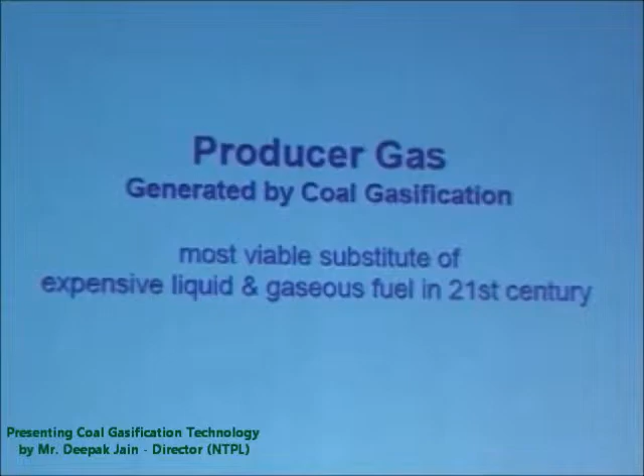Producer gas is generated by coal gasification, which is the most viable substitute of expensive liquid and gaseous fuel in the 21st century. Now, what is gasification? It is a thermochemical reaction that converts any carbonaceous material into combustible gas, known as producer gas or syngas, by using heat. Ultimately, it is the game of partial oxidation of carbonaceous material. The equipment that converts carbonaceous material into gaseous fuel is called a gasifier.

This is for your confidence and strong references. We take a little bit of the history and footprint of coal gasification technology in the world. Coal gasification technology was invented in the 18th century, but industrialization was done in the early 19th century by a German company named Lurgi. The first two-stage coal gasification was developed by Foster Wheeler Energy Corporation, New Jersey in 1905.

The first coal gasifier installed in India was in Jalgora in 1936, in Ranchi, by the company Lurgi, and it was a fixed bed updraft single-stage coal gasifier. Asia's largest coal gasification batteries are still running in Ranchi, Heavy Engineering Corporation, since 1965, all two-stage coal gasifiers supplied by Skoda Czechoslovakia. 10 extended shaft coal gasifiers are still running in BHEL Trichy since 1976, supplied by Ruhrgas, Germany.

The technology has a proven track record and successful replacement of industrial fuels like HSD, FO, SKO, LPG in all applications like direct and indirect heating equipment. Overall, gasification technology is India's most viable substitute of expensive liquid and gaseous fuel in the 21st century. As India has the third largest reserve of coal, the ultimate raw material of such equipment is only coal, so you depend only on Indian fuels. The fluidized bed and entrained flow is a large scale investment for larger consumers.

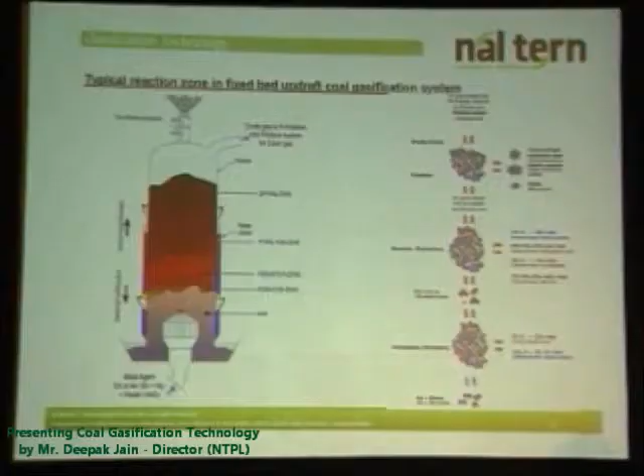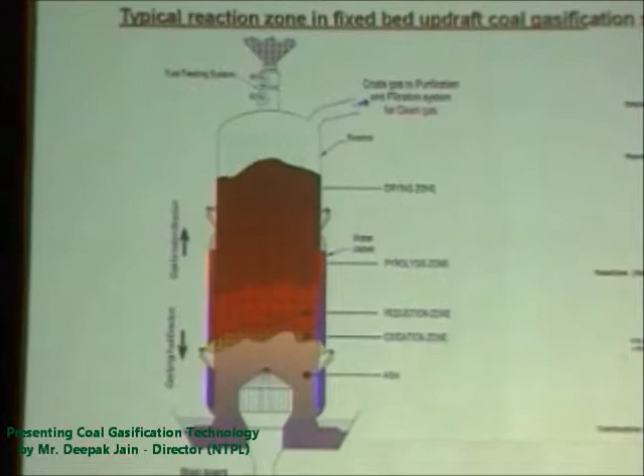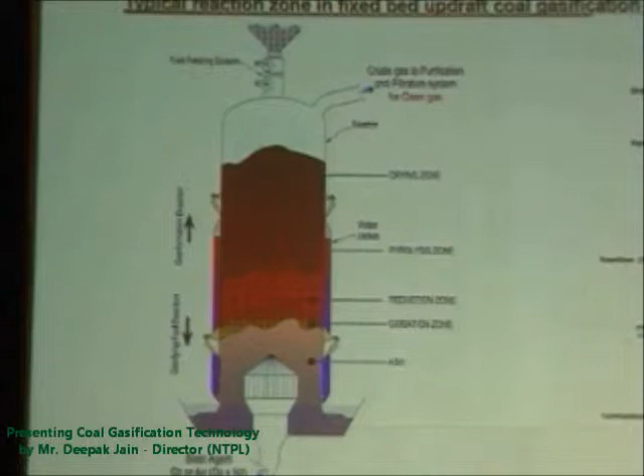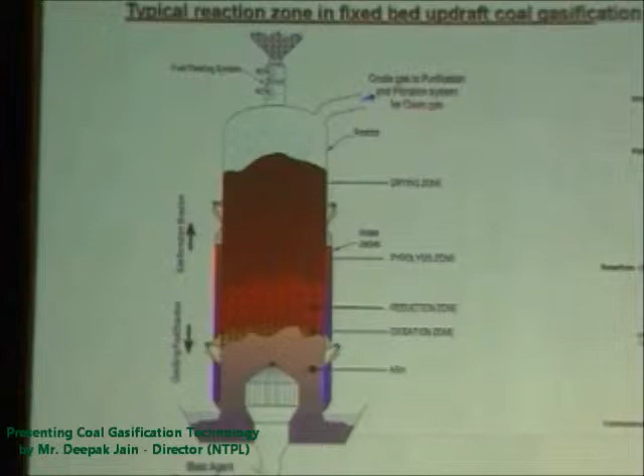This is a typical reaction. Fixed bed updraft coal gasification starts from the coal feed, which travels downward, and gas formation goes from downward to upward. So this is a counter-current reactor. The air and steam mixture is injected from the bottom of the gasifier, and first it reacts in the oxidation zone, where carbon and oxygen react to form CO2 and release a high amount of heat. Using this heat, H2O reacts with carbon and converts into CO and H2.

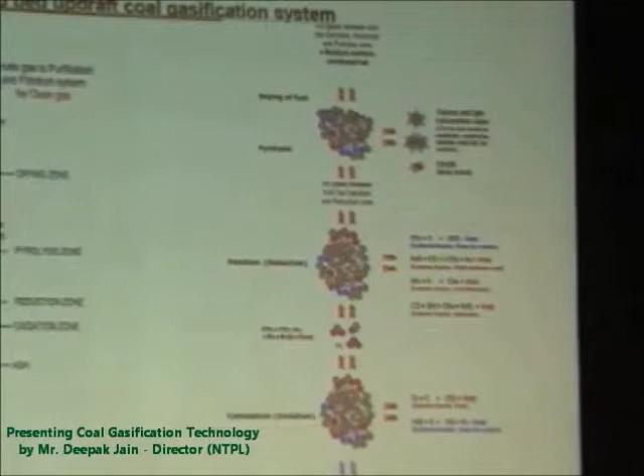Later on, it enters the reduction zone where the major gas components are formed. CO reacts with 3H2 in methanation to form CH4. 2H2 reacts with carbon to again form CH4. Like this, there are more than 20 reactions in the reduction zone. Once the gas is formed, it enters the fresh coal coming from the top, where the volatile matter is driven off and comes out with the gas stream. The amount and quality of that volatile matter ultimately depend on the gas temperature and the condition of the beds inside the reactor.

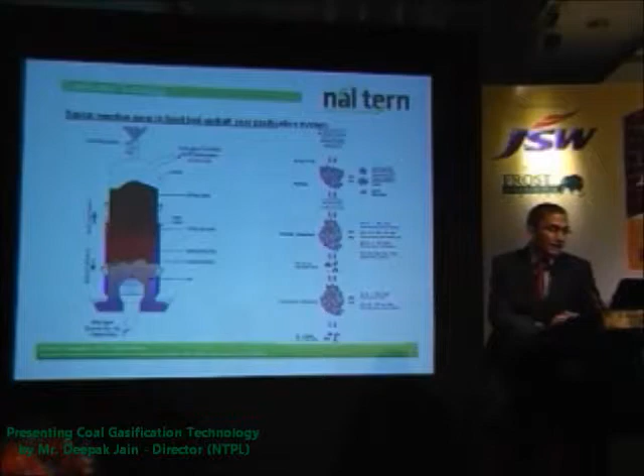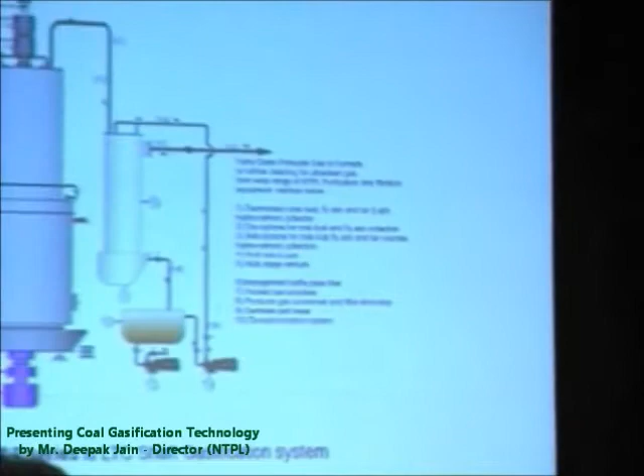The low temperature parameter delivers fairly clean and soot-free gas, easy operation and maintenance, and is suitable for long distance distribution of producer gas and continuous operation. You can see the reactor and its line diagram for the entire process. The reactor has self-producing steam facilities; the steam generated is collected in the vapor drum, then distributed across the plant wherever required. Coal feeding is fully automatic with the bunker arrangement, discharging coal according to set temperature.

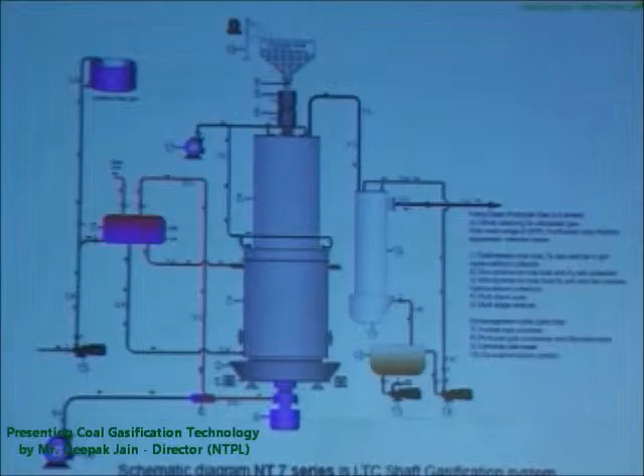The gas generated passes through the primary scrubber, where we clean the gas, and it is suitable to replace furnace oil. Then, if we require further cleaning, it can be passed through the filtration train that we'll see in a later slide. The scrubbing media is 100% recycled. There is no kind of drain at all in the plant. And the tar collected here is stored in the storage tank.

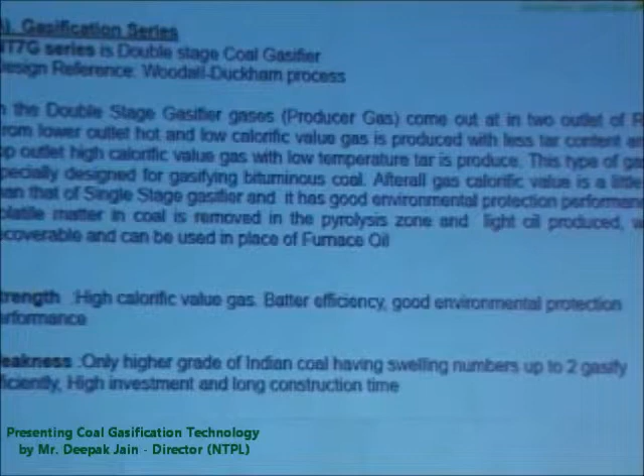We introduce the double stage coal gasification system. This design reference is taken from the Woodall-Duckham process. In the double stage gasifier process, gas comes out from two outlets of the reactor. From the lower outlet, hot and low calorific value gas is produced with less tar content, and from the top outlet, high calorific value gas with a low temperature tar is produced.

This type of gasifier is specifically designed for gasifying bituminous coal. After all, we blend both gases in a single pipeline, and the calorific value is a little higher than all single stage coal gasifiers. It has good environmental protection performance, and the volatile matter in the coal is removed in the pyrolysis zone, and light oil is produced, which is further cleaned and stored in tanks, and it can be used as a furnace oil also.

The strengths of the technology are high calorific value gas, better efficiency and good environmental protection, and the weakness of this kind of technology is that only high grade Indian coal, having a swelling index number up to 2, can be gasified efficiently. And this is the schematic diagram.

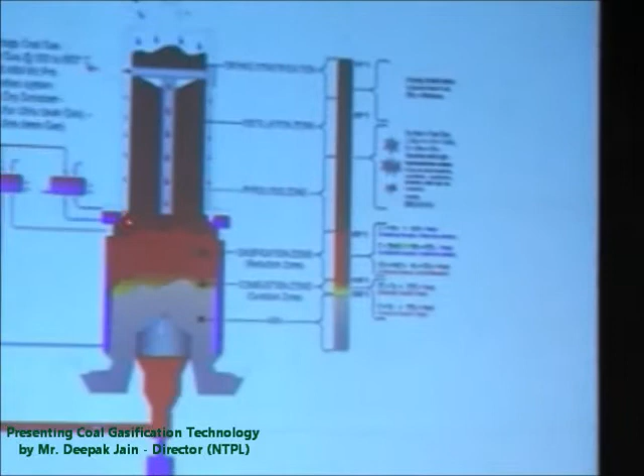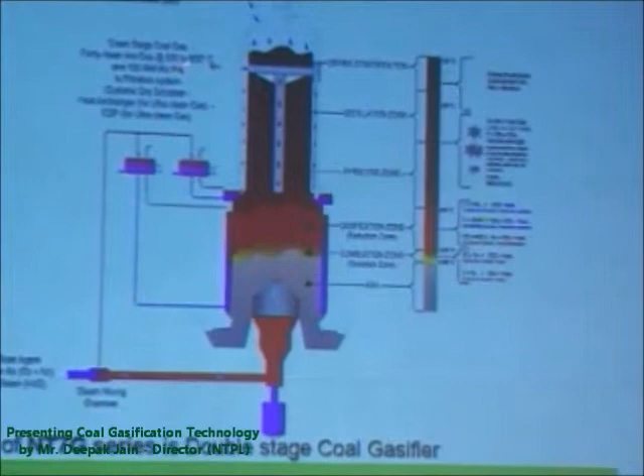As I said, there are two collection points in the reactor. The first zone is very close to the grate. Whatever coal has reached up to here is already devolatilized. So the gas released from here is hot, around 500 to 600 degrees centigrade, containing carbon and hydrogen formation. All the volatile matter is driven off from the upper stage, where the gas temperature we are getting is 120 to 150 degrees.

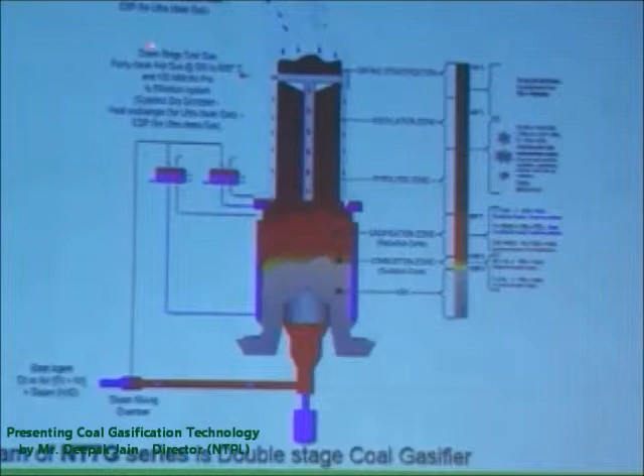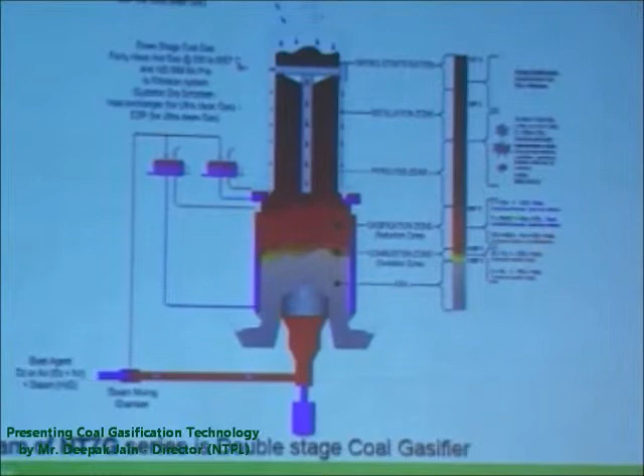Then we pass this gas to the filtration system to collect all the volatile matter which is in vapor form, as well as all the dust, and then it passes through the ESP for the ultra clean stage. These are some tentative arrangements to fulfill larger demands of gas volume. We can battery this kind of gasifier up to 20.

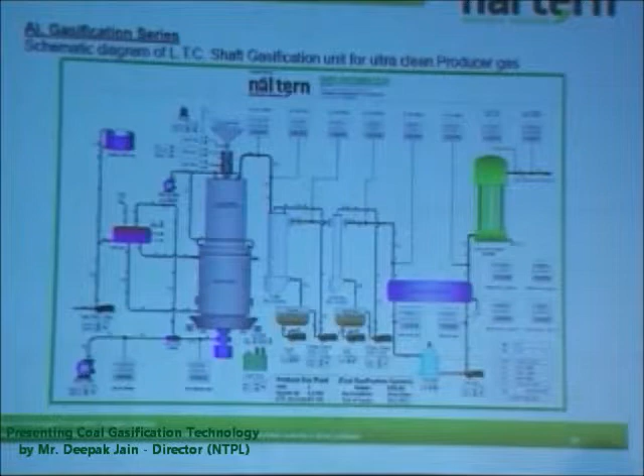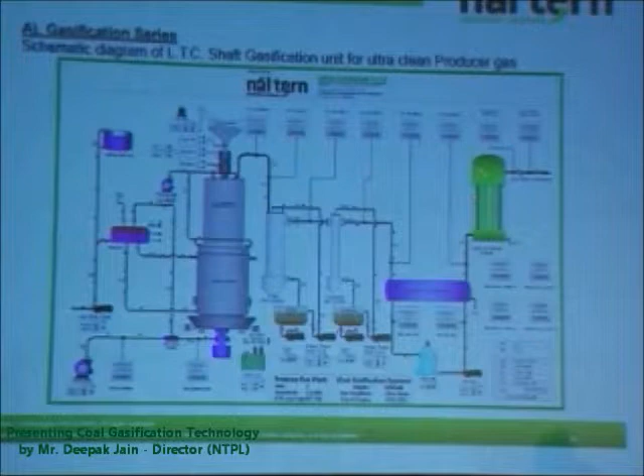This is the ultra clean scheme of the coal gasification reactor. This is the LTC shaft coal gasifier, the primary scrubber, then secondary. We condense the gas here before injecting it into the ESP. Then from the ESP, WESP, the gas has only minor impurities and travels to the end user equipment.

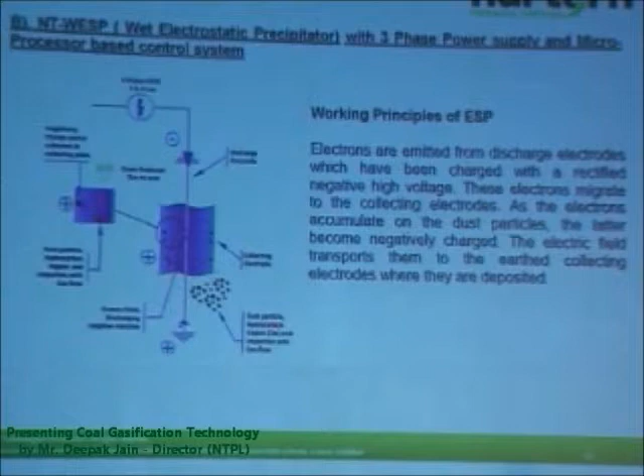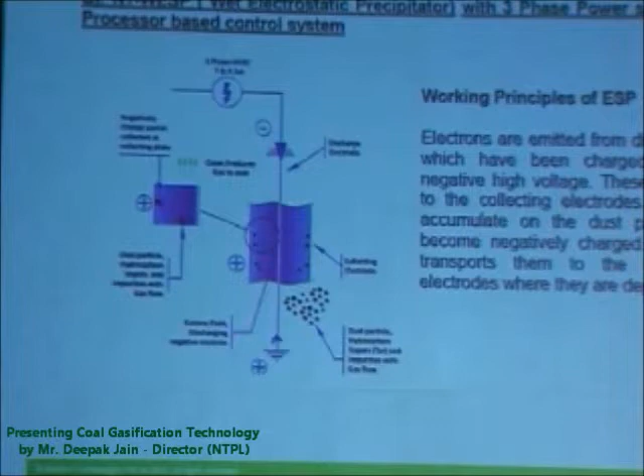Once they enter the environment of the high static corona field, the negative electrons stick to the dust particles and they become negatively charged. The electric field transports them to the earthed collecting electrode where they are deposited. So ultimately, at the end, the gas is completely clean. What is the microprocessor based control?

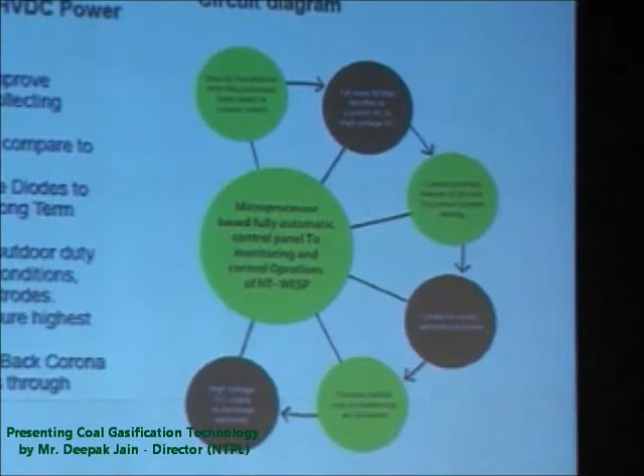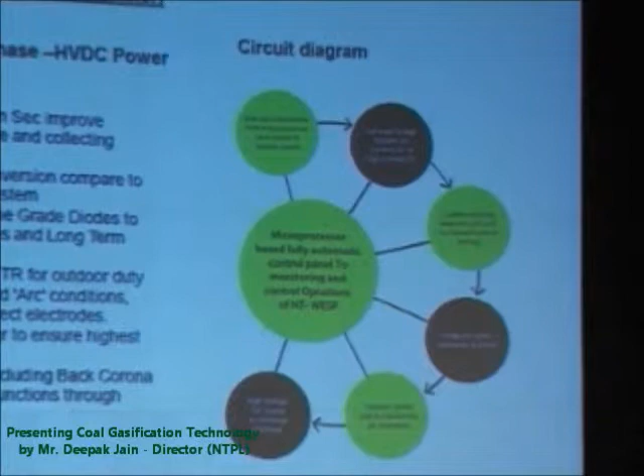As I say, in the circuit diagram here, first off, the power supply starts with a step up transformer with a fully protected earth switch and isolator switch, for the benefit of sustaining high surge loads and also providing the earth switch for maintenance purposes. Then after it is the full wave bridge rectifier controller, which converts the AC current to high voltage DC.

With the full wave 3-phase, we get a pulse width of 3.3 milliseconds, which improves the efficiency and life of the discharge and collecting electrodes. And ultimately, because of 3-phase and very small pulse width, the kV average is 20 to 25% higher than a traditional single phase power module.

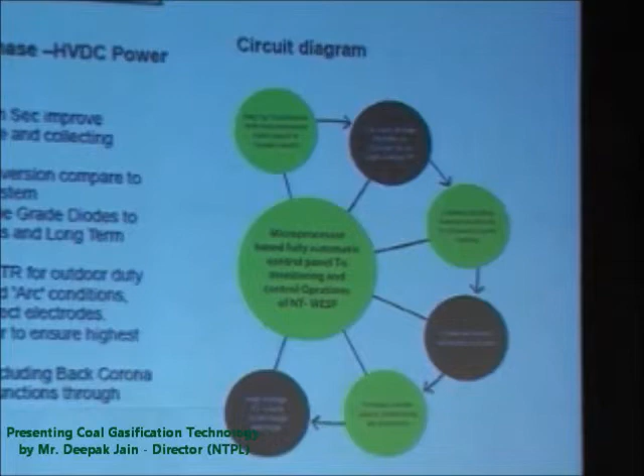The current limiting reactor unit monitors the current supply. The thyristor control and current limiting work simultaneously in the event of arc formation, and the arc is resolved within 3 milliseconds to protect the equipment, and power is restored immediately. The entire system is controlled with microprocessor based fully automatic control, so very little human interface is needed during the process. In traditional systems, there is a toggle switch, and the operator needs to monitor frequently. So this is completely automatic control.

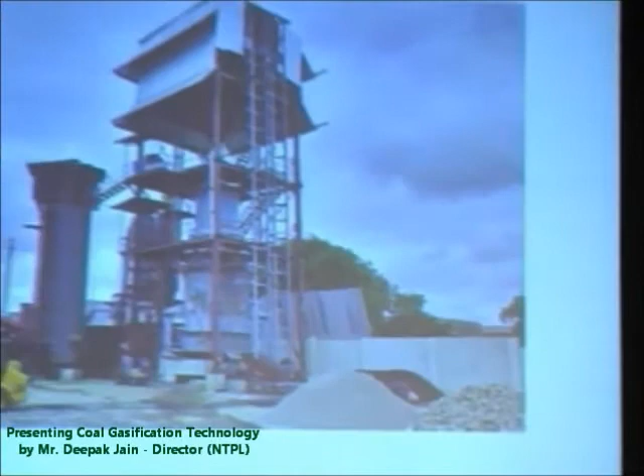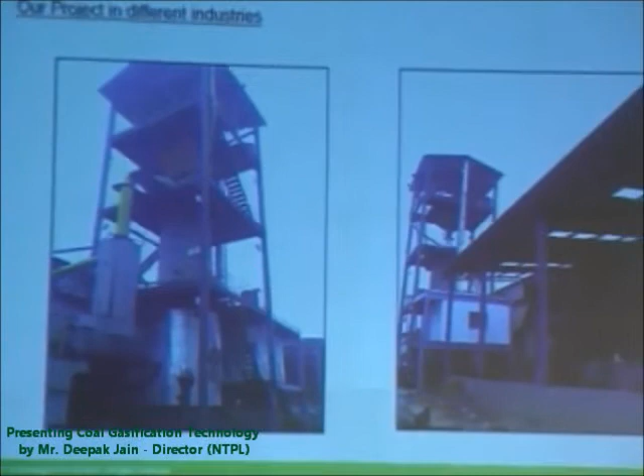Here are some of our installations of the coal gasifier. This is the ultra clean series coal gasifier reactor, then filtration system, wet filtration system, then it passes through the ESP and delivers gas to the end users. These are a few of them. These are the LTC shaft coal gasifiers. These are high temperature coal gasifier installations. This is also high temperature. This is our filtration train.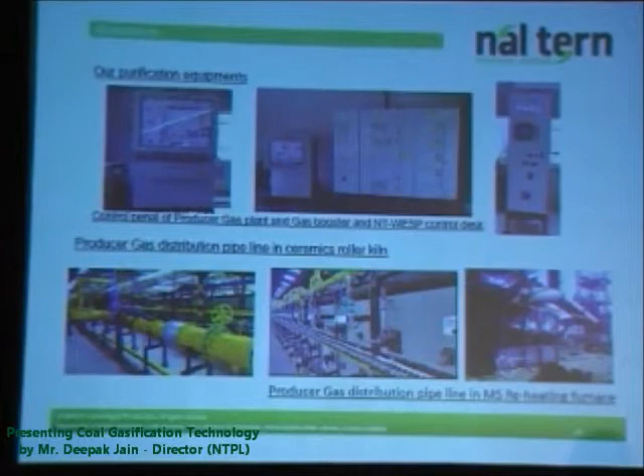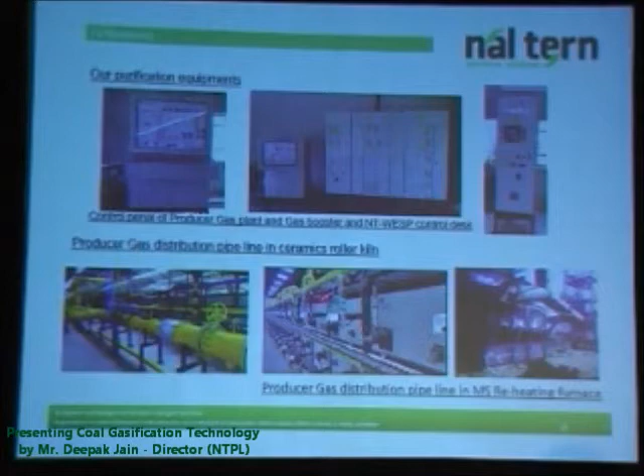This slide shows our control panels. First photographs, our booster panel modules, MCC panels, and this is the microprocessor based control for the WESP. This is a gas distribution train. These are distribution headers, and this is in ceramic. Both are ceramic, and this is in the steel industry. Here you can see the pilot flame, judging the richness of the gas.

Here we collected tars from the WESP. It is similar to furnace oil, easy to handle as well as store, and used in place of furnace oil. This is our continuous fuel feeding system.

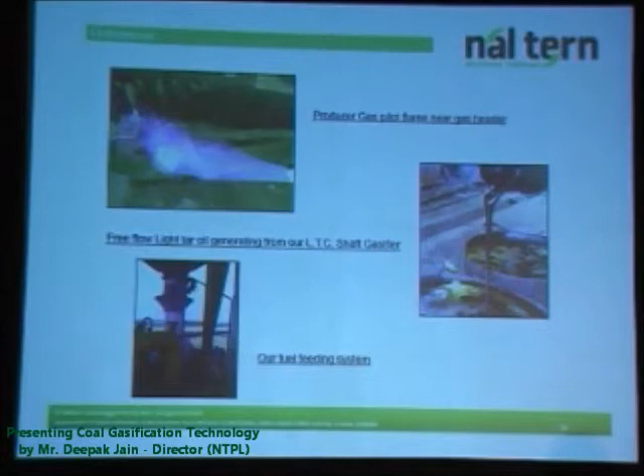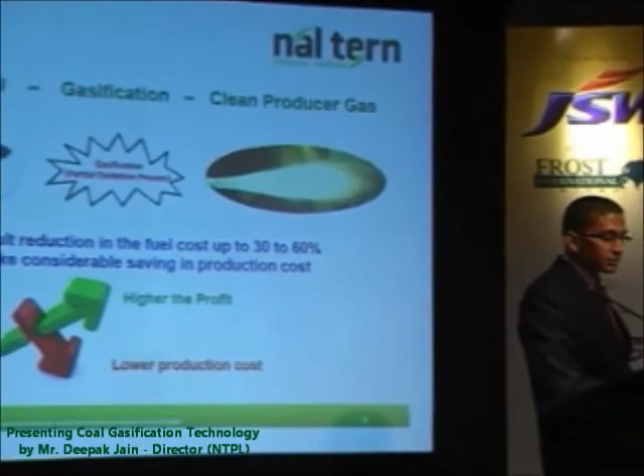The ultimate conclusion: the worst coal, by the route of gasification, is converted into clean producer gas, resulting in a reduction in fuel cost of up to 30 to 60%, making considerable savings in production cost. The lower production cost results in higher profit.